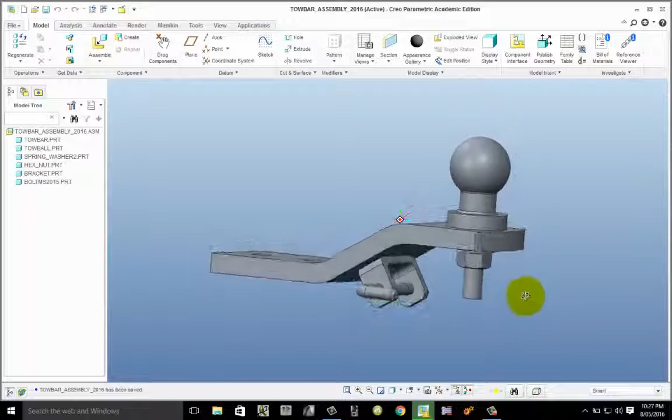Welcome to this tutorial, which deals with a certain part of this tow bar assembly, specifically this U-shaped bracket that we see here, which is welded to the underside of the tow bar.

If we go back to the drawing given to us in the classwork, we need to do some analysis of that drawing, so we'll pop over to PowerPoint. We can see here's the bracket made from MS, which stands for mild steel. From this drawing we can analyze it and work out some dimensions and a way to go about drawing it. First, let's look at its overall dimensions - it's a U shape.

It's 52 millimeters in length. If we look for a height here, on the right hand side we've got some lines extending down to what would be a corner, but we can see there are rounds there as well. The distance from that corner would be 25, and the distance from that center line to the end is 12.5, giving an overall height of 37.5. The overall width given to us here is 25.

I'd like to show you an alternate way to create this object rather than just drawing it as a full U. So remember those dimensions, 52 by 37.5 by 25, and we'll start with that. Let's pop over to Creo.

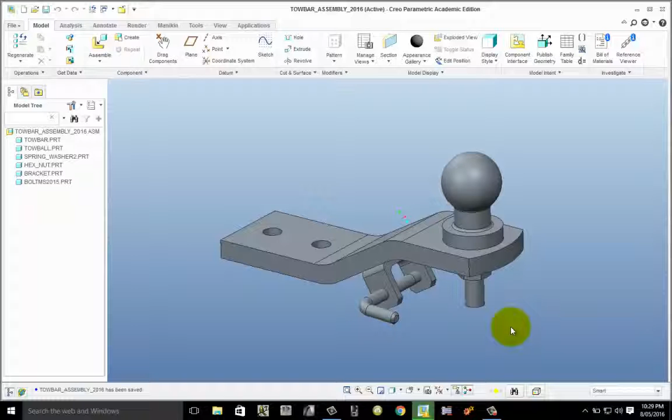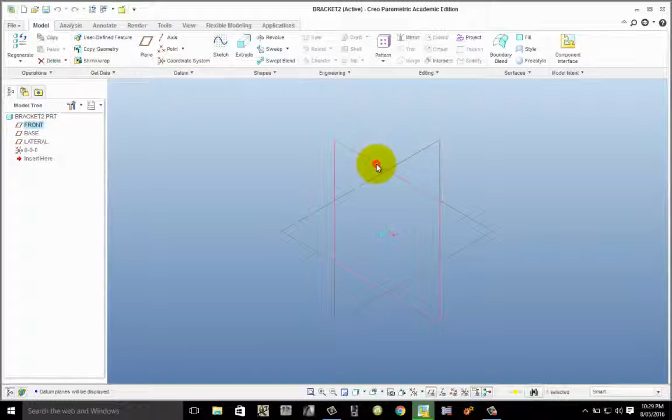As we normally do, create a new part. I'm going to call this one bracket 2. Click OK, of course, click OK. Turn your planes on, wherever that might be, and choose one of the vertical planes to put your first sketch onto. Click onto the sketch button, and we can start to sketch.

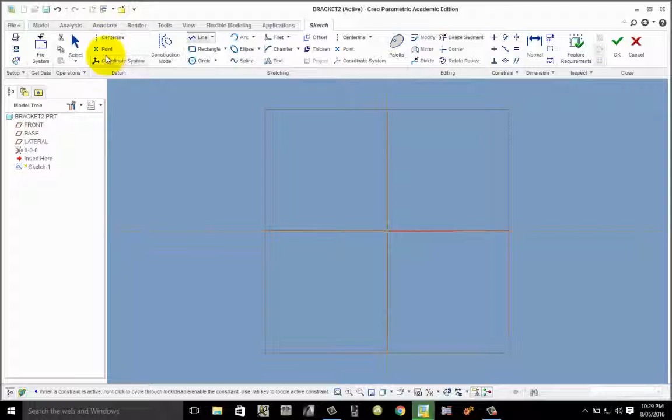What I like to do is put one line down first, just any length, then finish it by clicking on the center mouse button or the select button. Once that's done, we can start to put some dimensions in. My mouse got a bit crazy there - I don't want that little line I just drew, so I'll get rid of that as well. Strange things are going on there.

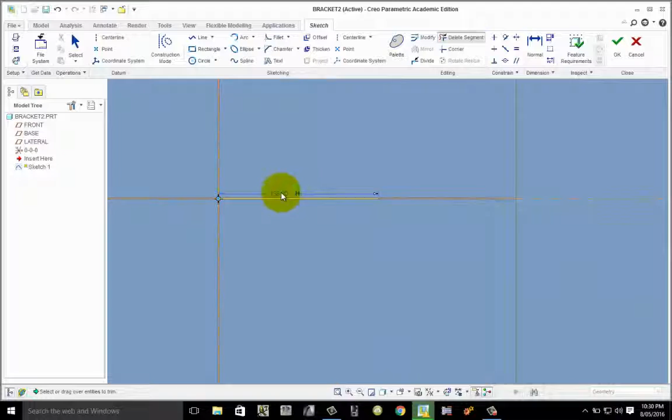It's saying 136, which I certainly don't want. So I'll change that to 52, which represents the length of the actual bottom of the U. Everything else we draw from there, so lines are going to be relative to that 52 millimeter line.

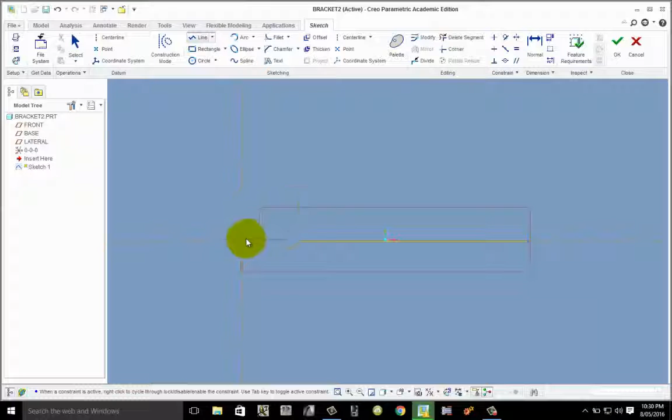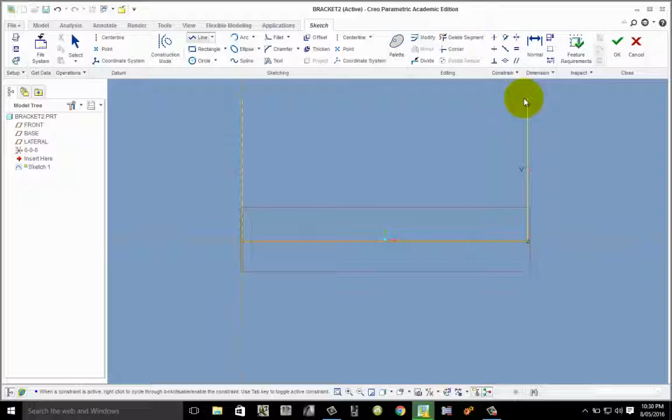I'm going to go back to my line tool, snap to the end of this line, drag a line up vertically - the V for vertical - and center mouse button to finish. Then come over to the right hand side of the baseline, drag a line up vertically, see the V constraint appears, and keep dragging until you see the L appears on both of those, which means that's a line of equal length. You can see the L on the right and the left there, and center mouse button to finish.

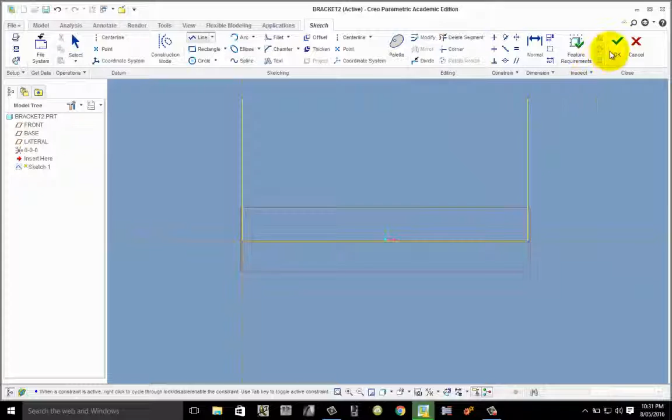Now normally at this point you would get out of here and complete this by drawing the inside L shape, but I want the inside U shape. I want to show you an alternative today, so I'm just going to accept this sketch as a series of lines, just to demonstrate something, and turn around to 3D.

We'll go to the extrude tool, as if we were going to extrude this, and we can see that when we hit the extrude tool, rather than going to a default solid, it actually defaults to extruding it as a skin or surface. That's because it was an open loop of lines.

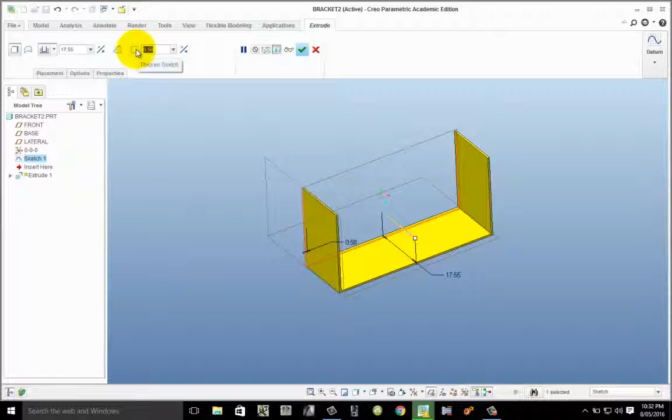Now we can actually use a thicken functionality here rather than doing it as a surface. If you click onto extrude as solid, this box becomes available, which basically says that sketch or those lines you drew can be thickened by an amount. I know from my drawing, if we go back to PowerPoint, it tells me that the thickness of this actual bar is 6 millimeters thick. So in my thickness here, I'll type in 6 and enter.

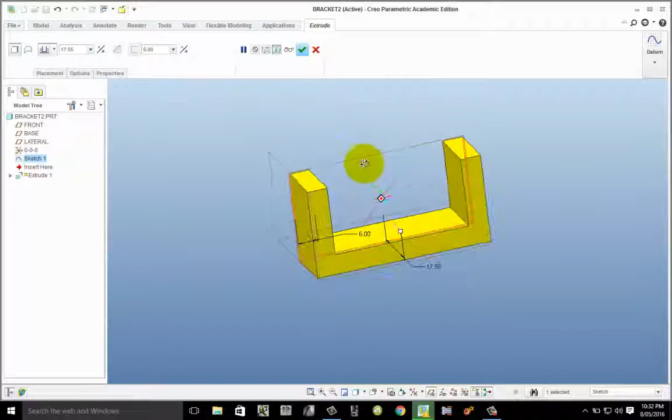You can see that it now assigns a thickness to that line. It's important here to see that the red line from the sketch is on the outside, and it's assigned the thickness to go to the inside. You can scroll through some other options here. If I click on this icon beside the thicken, we can change the direction that it thickens in - I click once and you can see it goes on the outside of the red line.

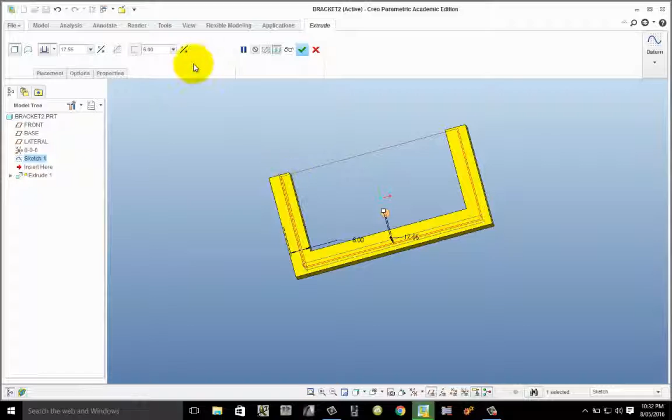Click one more time and it should go to the mid of the red line. You can see it's gone 3 mil either side, and click again to scroll back, and you can see it's gone to the inside of the red line, which is what we're after. If we remember back to our drawing, the whole thickness was a distance of 25. Accept that, that's just something that's a little bit different to the way we might have done things in the past.

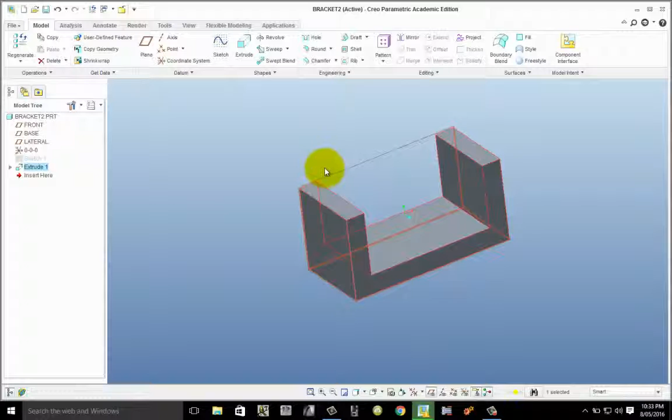So the thicken functionality within extrude. Now at this point here, I might just turn these sketches off - sorry, not sketches, the planes off, so I can see things a bit easier. And if we go back to our drawing, we'll look at the next thing to actually complete.

I'd probably now go about doing these rounds that are on the inside and outside of this 6mm thick bar. Now there's nowhere on the drawing that actually gives you a radius, so I'm going to assume that these radiuses are equal to the thickness of the material, meaning it's a gradual bend to equal thickness of the material. So they're going to have rounds of 6mm. If it's not given to you in a drawing, then it's implied by some other means, which in this case is the thickness of the material.

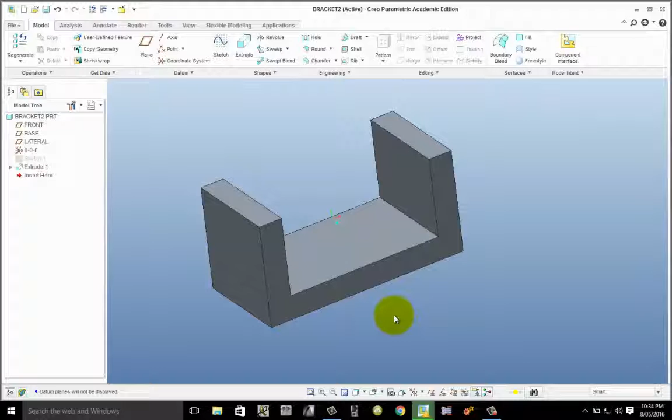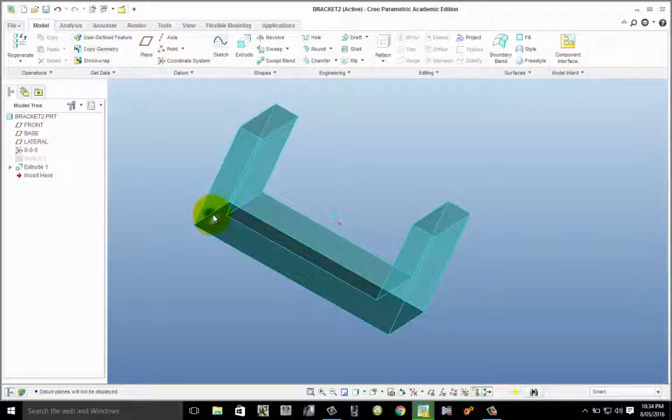So we'll go back to Creo and roll my object around slightly, use my left click - right click button I should say - until I get the object actually highlighting the piece that I want. It's a bit strange, this mouse. Okay, there's one selected. Hold down the control key, hover over the next one you want, select, select, select. Oops, there it is, I've got all those 4 selected.

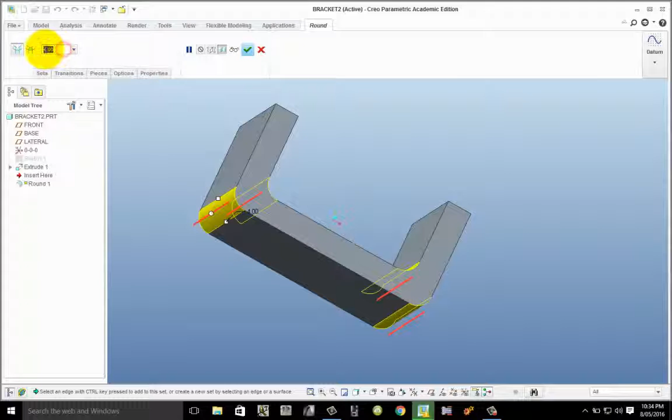Now I've got them selected, I go up to my round tool and simply type in the value of 6mm, hit the enter key, and you can see it's assigned a 6mm round to all those 4. I'm happy with that, tick the green tick, and that is that easily done.

Okay, back to our drawing again. So the next easiest thing to do would be probably these chamfers on top. We can see that the 1, 2, 3, 4 edges of the top of that U shape there have been chamfered off, probably for the purposes of them being a bit safer so you don't cut your fingers on them. And they are a 4mm chamfer at 45 degrees - 4mm meaning from the outside edge to where it starts is 4mm. So we can do that with our chamfer tool.

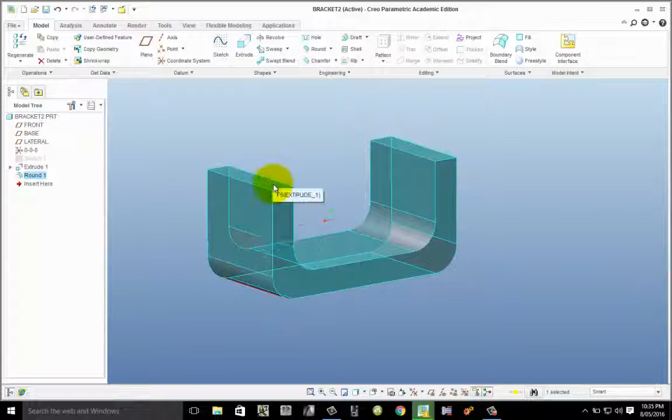So once again we'll select that edge, hold down control, select the other edges. 1, 2 - it's been painful to me - 2, 3. Okay, got them there. And where's the old chamfer tool? There it is there, chamfer.

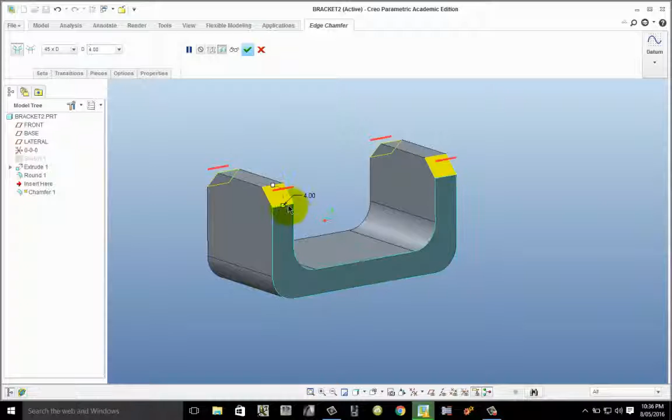Now within chamfer you've got different ways of setting it, so we'll have a look at that. There's dimension by dimension, D1, D2, angle by dimension, and it defaults to 45 by dimension. So I'm going to choose 45 by D, and the dimension was 4mm, and hit the enter key. You can see it now puts a 4mm chamfer, that's an angle of 45 degrees, and we're happy with that, so we'll tick that.

Okay, next thing to do is most likely going to be these holes. So we can see we've got 2 holes in the bracket. This hole's got a label on it saying M10 by 1.5, whereas this hole has just got a diameter. So there's quite a distinct difference between the two of these. This one with just the diameter means it is literally just purely a hole, whereas this one here with the M10 is a giveaway that it's a hole with a thread.

And if you look here, M10 by 1.5 - another part of our objects for this tow bar is also the bolt, which has an M10 by 1.5 thread as well, which means of course that this thread must go into that thread there. So we're going to use the hole command, not just circle and extrude, to actually complete these 2 holes. So go back to Creo.

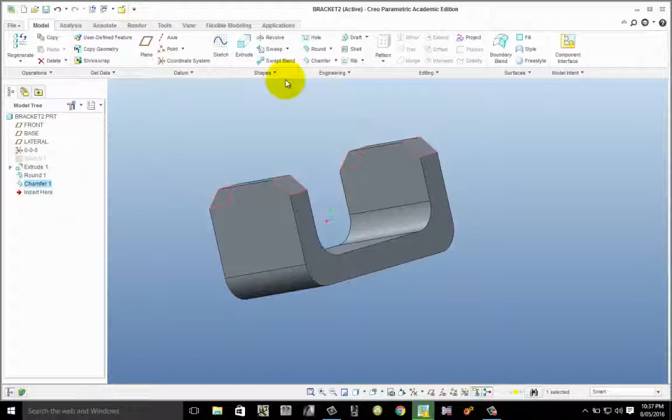I want you to choose a surface on the end of one of the U's, it doesn't matter which side it is, and we're going to put the simple hole in first of all on this end here. So come up to this engineering command here, click on hole, and you get a random circle, or if you like hole, appearing on that surface, and it wants us to give it some information. The first thing you do is these green handles here - you grab them and lock them onto an edge like so. So you can see I've locked that onto that top edge. Another green handle here, I'm going to lock that onto this edge over here. My mouse has been shocking to me - there it is there.

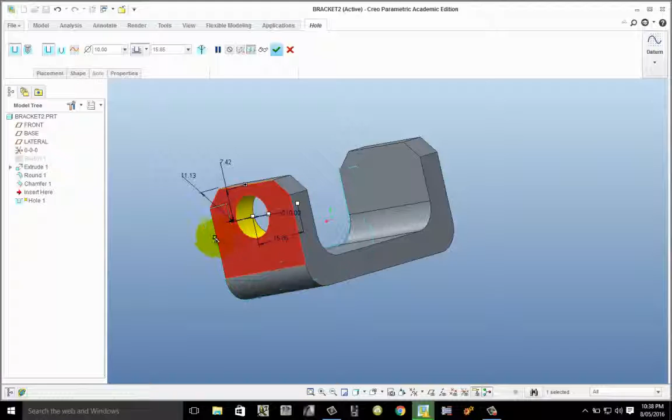So I've locked it onto that vertical edge and the horizontal edge, and if we look back at the drawing, the hole is equally placed, halfway between the two outside surfaces. So that would be 25 divided by 2, and I can actually type in 25/2 and enter, and that will do the calculation for you.

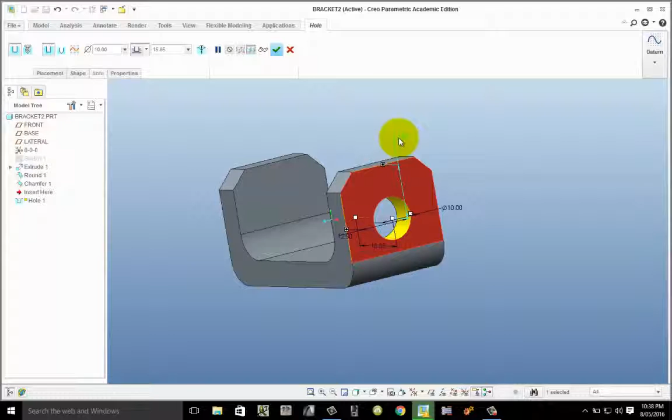Same with the top one here, 25/2, that was also 12.5. Ooh, that doesn't look right. Done something wrong there. Let me quickly go back and have a look. 12.5 to the center, that was right.

Have I made an error with my 37? Let's have a good quick look back. Okay, so if I'm not sure about a distance here, I'll just accept that hole for a second, and if I'm not quite sure whether I've got the height right, I can use within the tools the analysis tool.

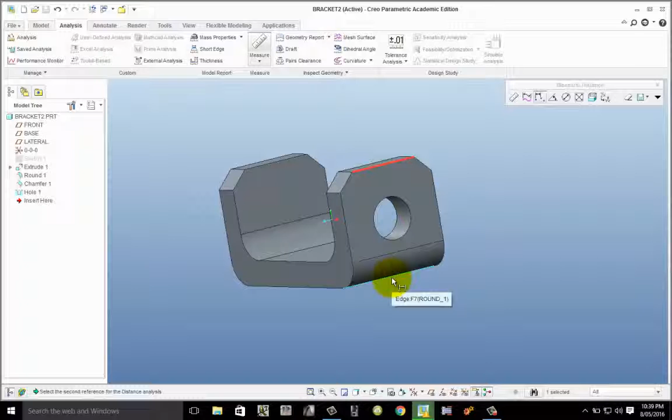Click on analysis, come to measure, click on this third icon which allows me to measure distance, and I'm going to choose that top edge, and perhaps this bottom edge by holding down control. It's measured a vertical distance, which isn't quite what I'm after. So what I might do is just look for two vertical distances, that one there, scroll that around. No, that one's below it. Control select. We can see that is only 26 millimeters for some reason.

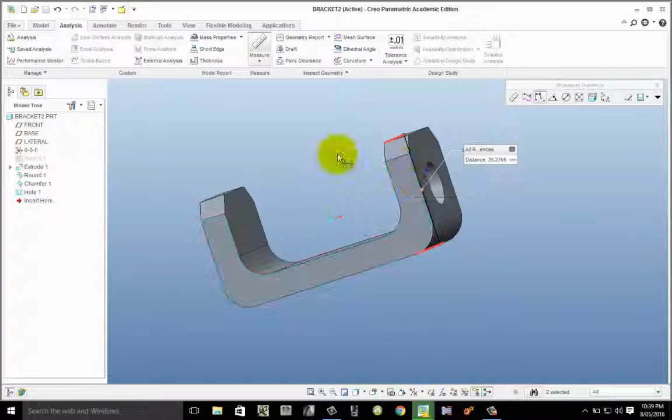So I've made a mistake there. What I'll need to do is go back and fix that. That's okay, just get out of the measure tool once you've used it by clicking on the red cross, or center mouse clicking. Go back to my initial sketch, edit definition.

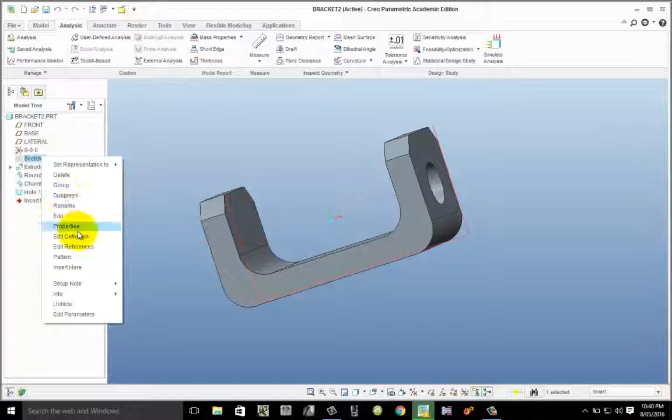Oh, what the heck's that thing? I don't know what that is. Line style, nothing to do with that. Go back to it again, try it again. Right click, edit definition.

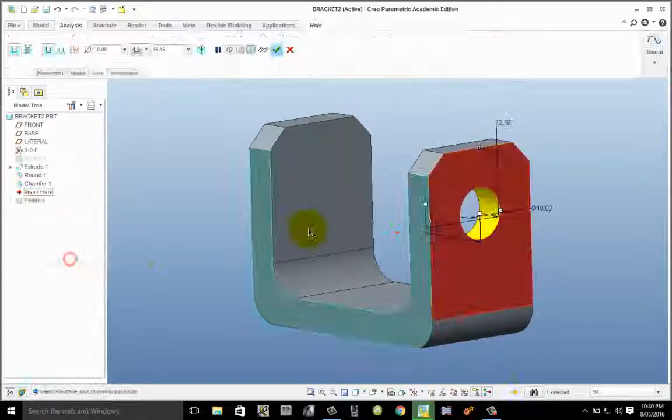There we go. For some reason I forgot to change that. Right, that was 37.5, I think, wasn't it? It was. And okay to that. There we go, that looks better.

Alright, so back to our first hole again, edit definition, and okay, 12.5 down from the top, 12.5 in from the edge, and it's a standard hole. So look across the top here in the ribbon bar, create a simple hole, that's what we want. Its diameter is 10, and that is just its depth that it goes in.

I mean, if you want to be picky, you could tell it to stop at a certain depth, I suppose, but there's nothing else in there. So that's okay, just click OK for that one. So that's a really simple one.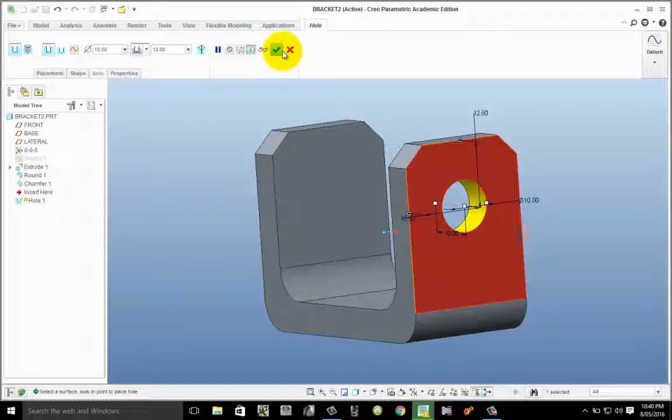All we need to do now is do a similar process to the other face on the other side, but we just need to assign a different type of hole. So select that face, go to Model, go to Hole again, grab your green handles, lock it on the top there, grab the green handle, lock it on the edge. Make sure these are also 12.5.

12.5. And this time, rather than just selecting a simple hole, the next icon over says a standard hole. Standard hole basically meaning it's going to have a thread, a hole with a thread in it. The next icon across talks about adding a tapping. Now, tapping is another name for thread.

So we've got that highlighted, and as soon as you've highlighted that, then you can actually create a tapered hole, but we don't want a taper. This next box over here defines the type of thread that we're going to put into it. So metric threads are built on, or another name for metric is ISO. Accept that ISO, and then the next box over gives us the option of choosing all the different types of metric threads that are commonly used.

So this one it defaults to is M1 by 0.25. We're going to make something a lot larger than that, so I'm going to scroll down here until I find my M10 by 1.5, I think it was. Just going to go back and check that. M10 by 1.5, so metric 10 by 1.5 being the pitch.

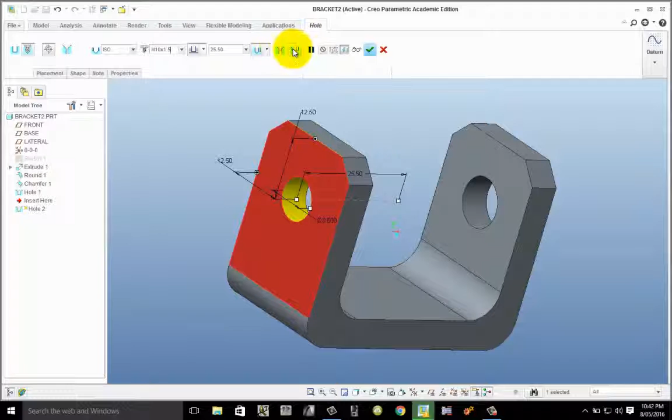And where were we? There it is here. M10 by 1.5. This is just the depth, we don't need to worry about it. We're not going to put a countersunk hole, we're not going to put a counter bore either, and we're simply going to accept that.

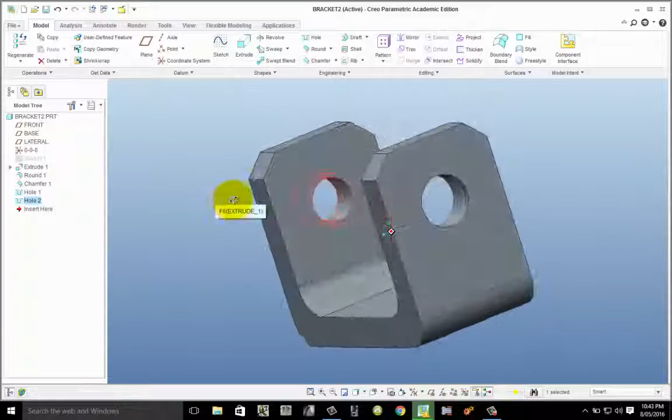Now you can see here that the hole size is actually less than 10, but the thread size is 10. So these two holes actually look like they are a different size, which is important because when we assemble it later, we'll need to know which one to put the threaded end into.

Okay, so that's basically the bracket going in, and then the next lesson will be how to place that onto the tow bar itself. Okay, let's save that, and then we'll do the next one.